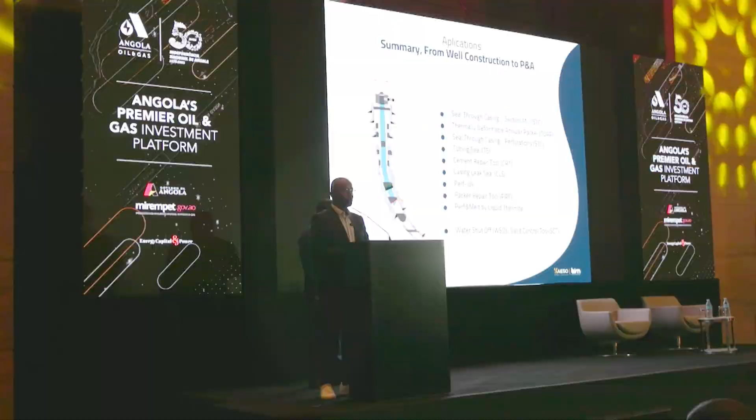Why are we here? We are here to talk about the business of oil and gas. What it consists of: punching a pocket of oil and gas. In this pocket, we have pressure and temperature, and because of it, it can lead to leaks. You will see that in our business, most of what we do is introduce technology that helps us contain those leaks, using different equipment at different stages of our well architecture.

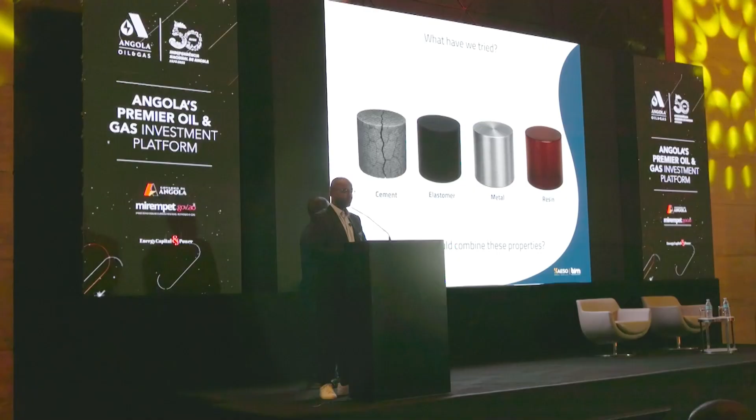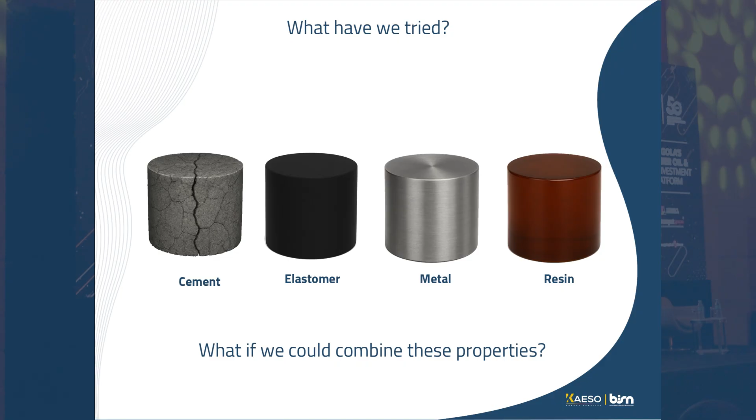We used different materials. We've tried to contain leaks with cement, but sometimes it cracks. We've tried with elastomers, but we know they get affected by temperature, pressure, and fluids. We've tried with steel. We also lately tried resins in complex geometry. The good thing about resins is that they take the shape of the medium where they are.

Now imagine if you have a material that can combine the properties of resin, taking the shape of complex geometries, that has the strength of metal, and that allows you to contain leaks as well as elastomers do. Well, ladies and gentlemen, this is why you're here today. This is BiSN.

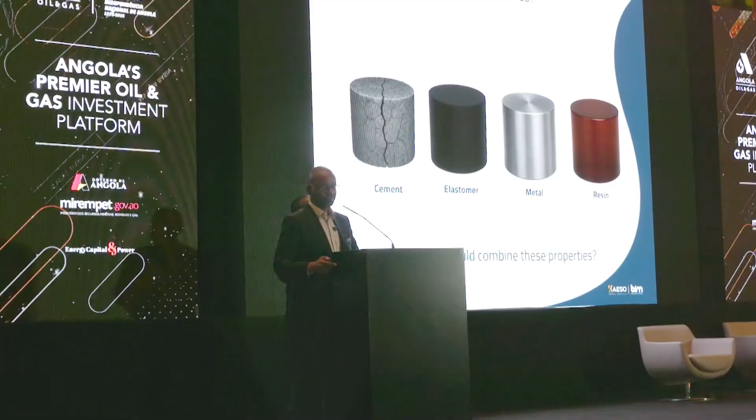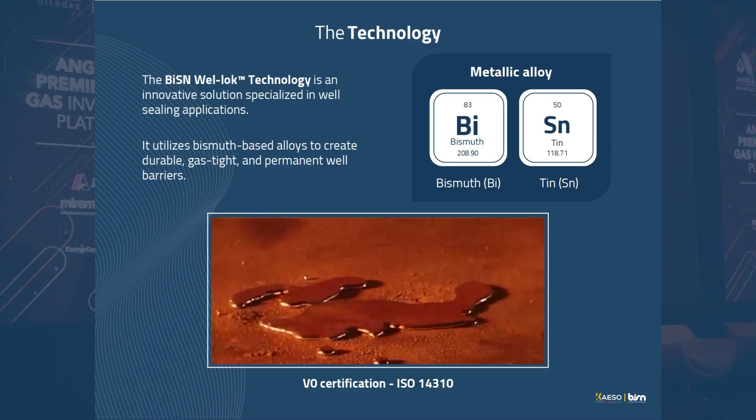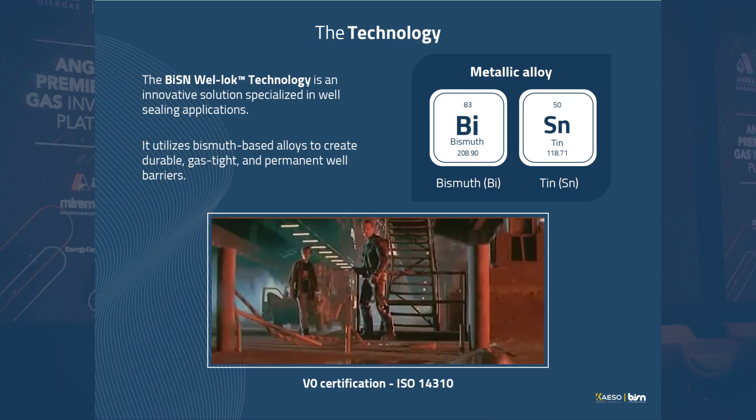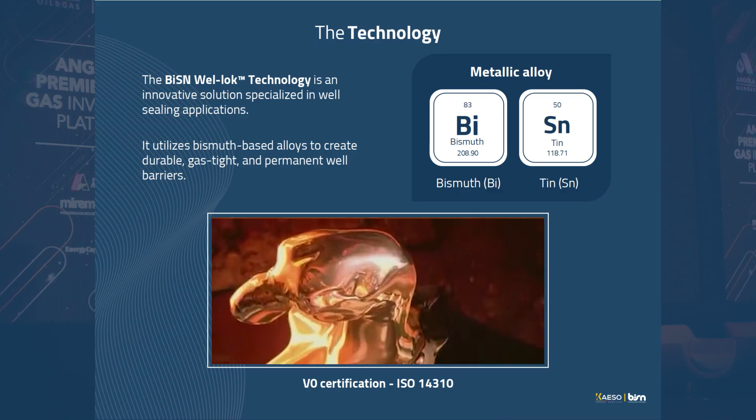Who remembers from which movie the line 'I'll be back' is? Yes, Terminator. In the second sequel, there is a strong enemy, the T-1000, an enemy that has liquid shape and can also solidify itself and become extremely hard and strong. This is one of the best visuals to explain to you what BiSN does.

This is a movie. Now, in real life, what does it look like? We will see a very short movie that will show you what it looks like in real life.

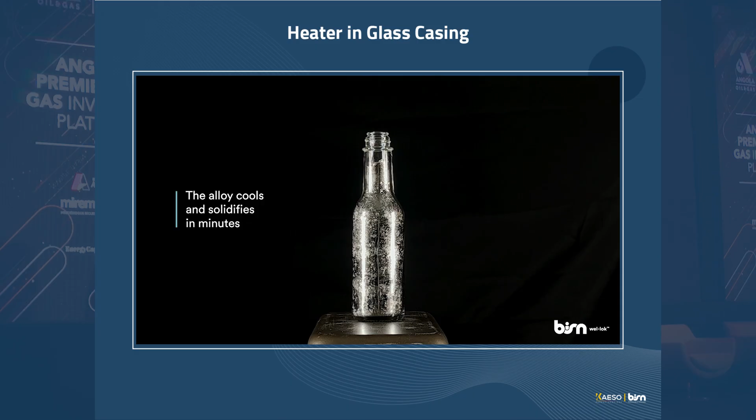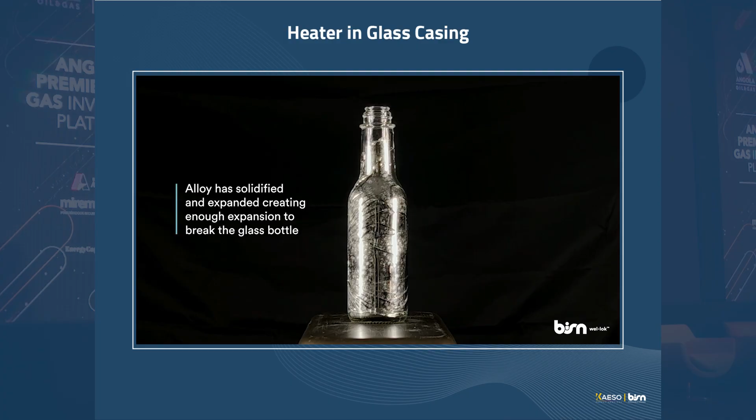You'll see a movie where we pour this magical alloy into a containment, a bottle. You can see it's liquid, and it takes the shape of the bottle. After a while, it will solidify itself, and as it solidifies, it will expand and start to crack the bottle. This is a property that will guarantee its sealing properties.

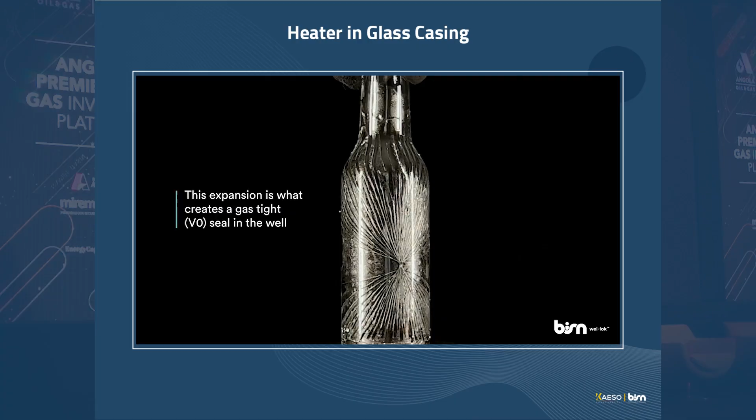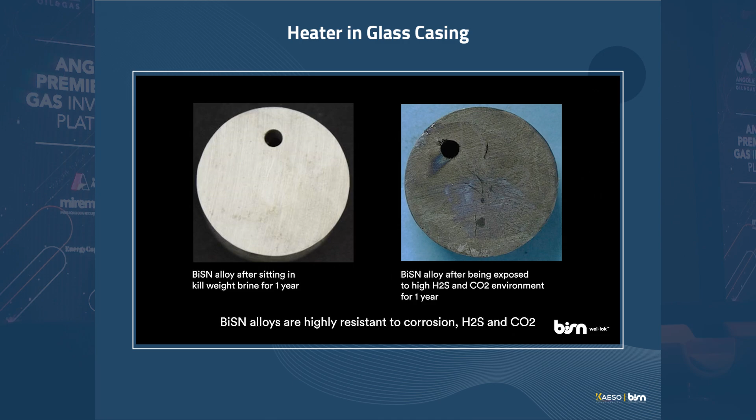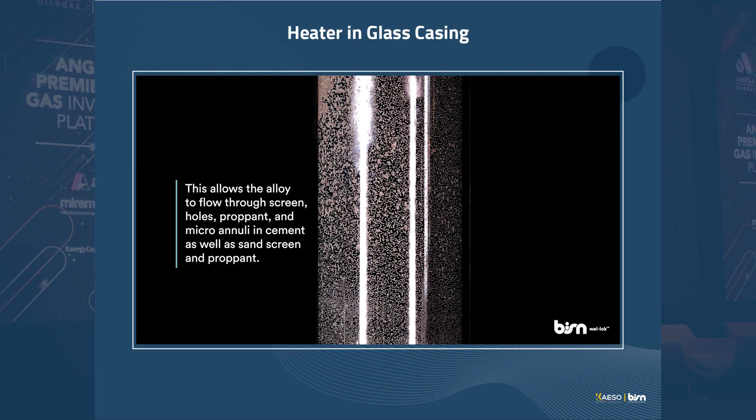One other thing you will see is that this material is V0, gas tight. It can contain fluids and gases. You will see that this material is durable and can resist H2S and CO2. You will also see that it is extremely fluid, like water, and can get into any type of void. Another interesting property is that this material has the density of lead.

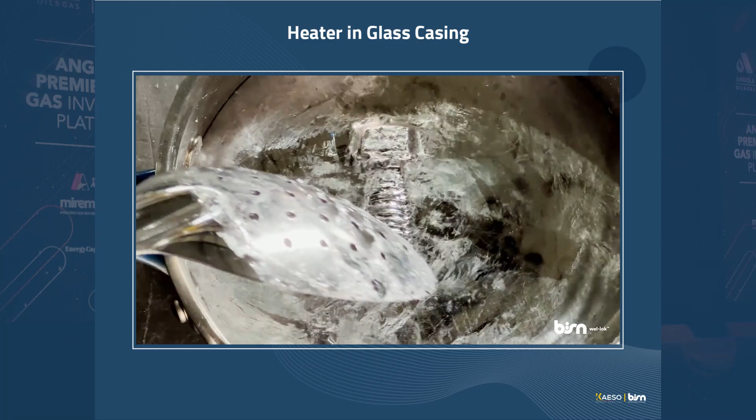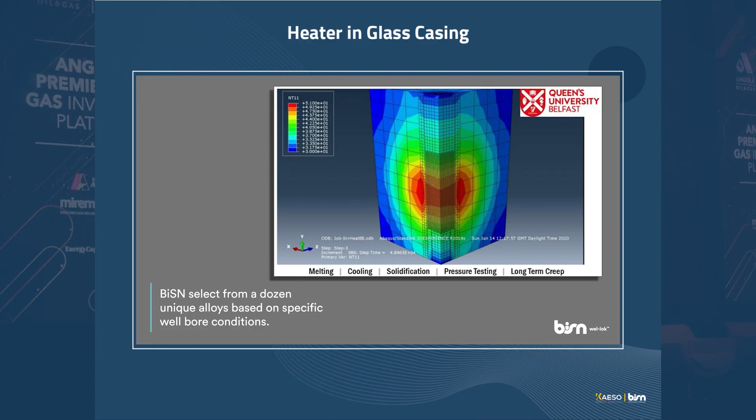Imagine it, as fluid as water and as dense as lead. Now think about that well architecture. How many things you could do with such a material? And this is where I will explain to you very quickly how we can use this material in the well.

The best analogy is to see this material as a candle. In the middle, you have the wick, right? And then around it, you have the wax. When you ignite the wick, what you will see is that the heat will slowly melt the wax, and the wax will take the shape of the material that contains it.

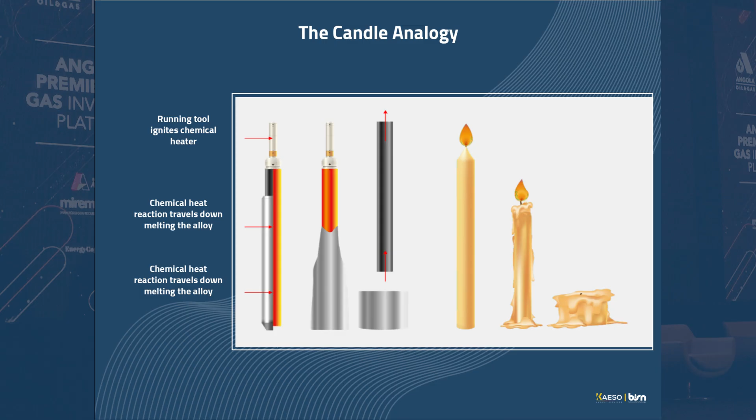So this is exactly what happens with the BISN in the well. You have an element in the center that will heat up the alloy, will make it liquid. This liquid will take the shape of the means where it is, and then it will solidify and guarantee that there is no leak.

So I will now leave the floor to Landry Pouna, who will explain to you in more detail exactly how it works. Thank you very much. Thank you, George, for your comprehensive introduction about BISN technology. Now I'm going to dive a little bit more into the technical details. I will try to keep it as simple as possible, just for everybody to understand.

So as George well explained, it is a liquid metal alloy that is used basically to create a seal in the well, right? And here we're achieving a gas-tight seal. Not only are you stopping the fluid, but you can also stop the gas. It's been qualified as a gas-tight seal, right? It's a technology that we actually deploy in Angola, and we saw it as a game changer. And I'm going to explain why in the coming slides.

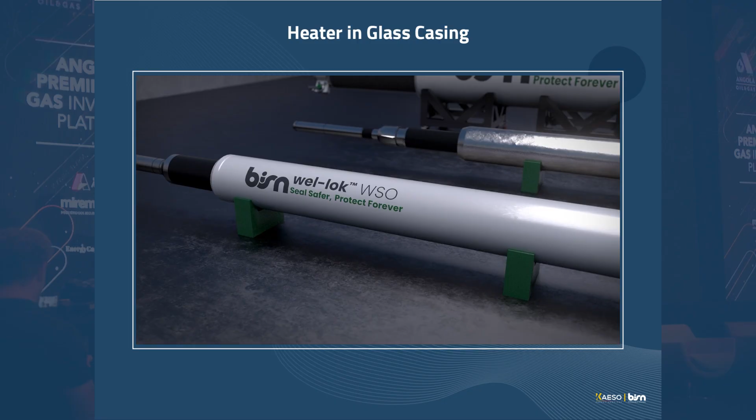I will start first with a short video, just to illustrate how this technology is deployed in the well for a better visual understanding. Start, you can cut the sound of the video, just the video. So in this example, you will see a clear example in the well of how the technology is deployed.

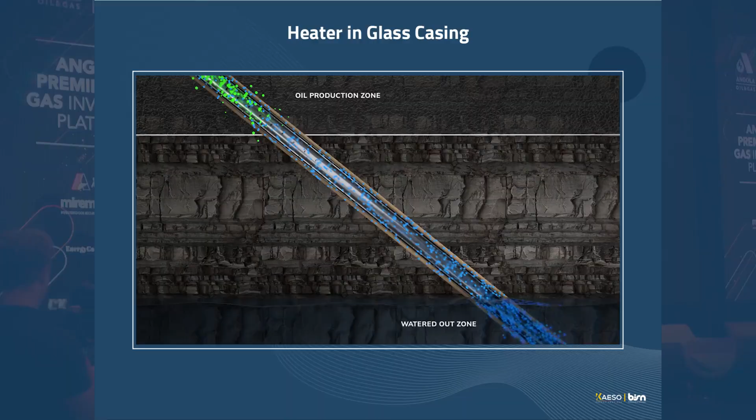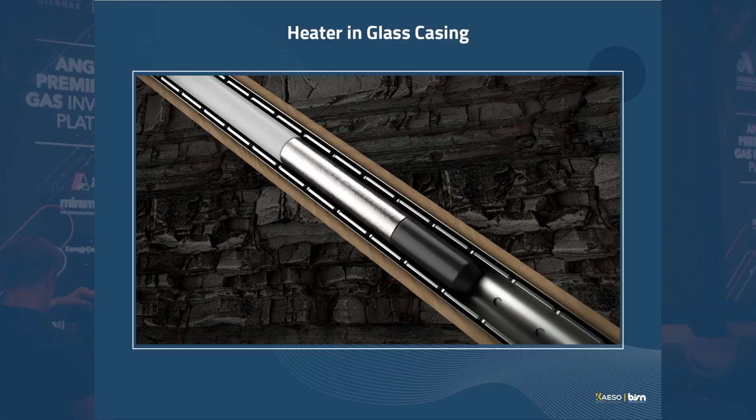So you have the tool that will be run in the well and set at the desired depth, right? The tool itself is like a tube that is packaged with the alloy and the heater, right? As you can see, you have the heater in the middle, and around the heater, you have the alloy. So you run it in your well to the desired depth.

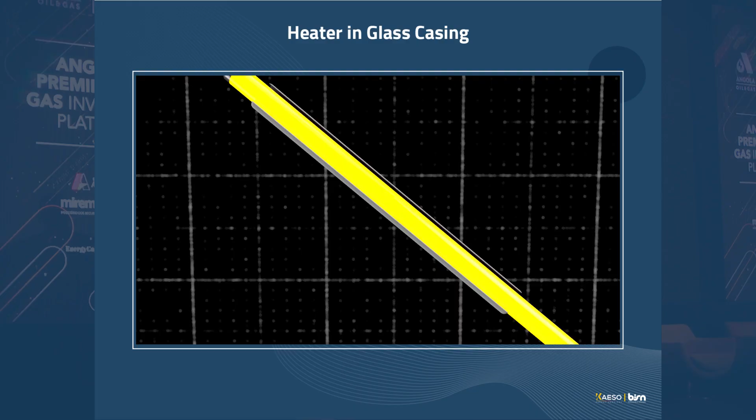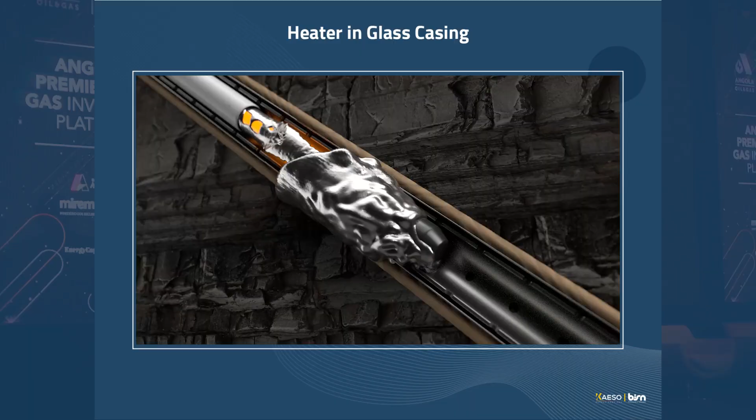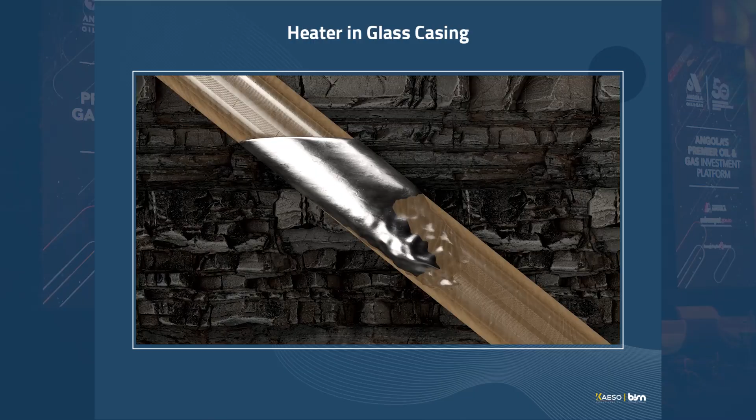You activate your heater. The heater, in turn, will melt the alloy, and the alloy will flow into the area where you want to achieve your seal, as you can see in the video. You pull your heater, you leave the area to solidify, and you can achieve a plug there. So you stop the unwanted fluid that was coming from the bottom, and you separate it from the top part, right?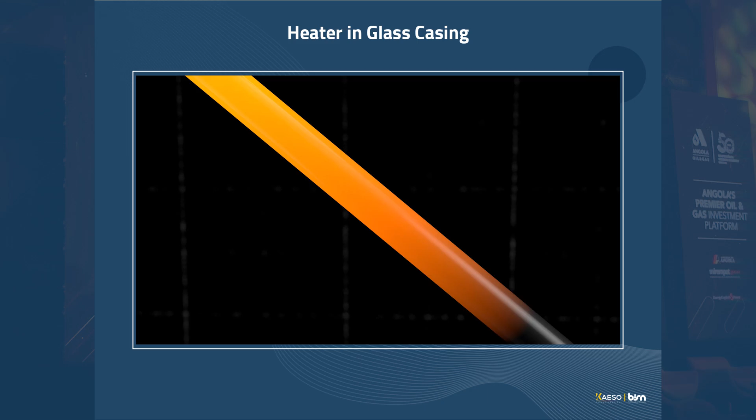That's a very simple illustration of what we call a water shutoff operation, right? So as you can see here, at the bottom it was the water that was shut off. So I started with the video for a visual understanding. I want to dive a little bit more into the operating principle. As you saw in the video, I split it into 4 key steps of how the technology is deployed.

The first step is deployment. So you have your tool that is prepared, I would say fabricated, for the application that you want. I want to dive a little bit more into the deployment method, right? All the conventional deployment methods: drill pipe deployment, slickline deployment, coiled tubing, or even e-line deployment.

So you have your tool that is prepared and placed where you want to create your seal for the well application that you want to achieve. Then activation: you deploy in your well and activate the heater, with thermite for drill pipe deployment, thermite for e-line deployment, or chemicals. So you bring your tool and it will melt the alloy where you want to create your seal. It will be able to flow into the area where you want to create your seal.

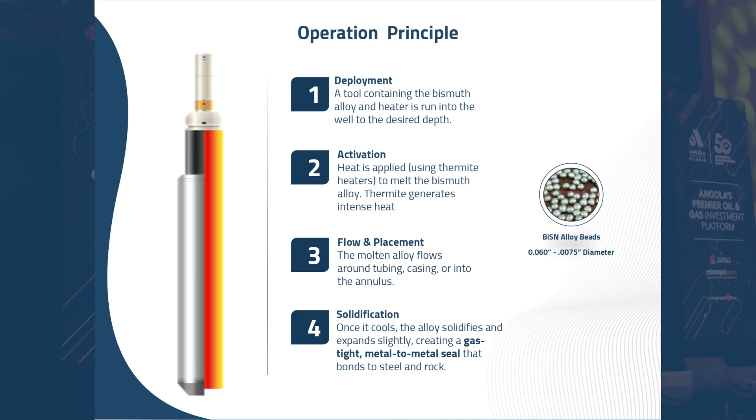You pull the heater, you leave it, and the deployed technology solidifies and creates the very durable metal-to-metal seal that George presented. If you are here in a liner or casing, or if you see on the right side, there are beads in the formation. For example, here you can see it. It is a very simple, non-toxic way of explaining the process of setting and deploying the technology in the well.

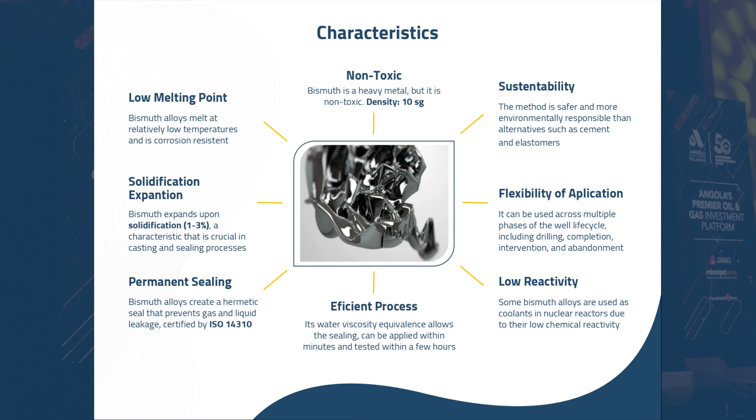Another key characteristic of this alloy is its integrity: it cannot corrode, it's resistant to H2S and harsh environments, and with its density it can flow easily in your well through gravity, into every void in the well. So imagine the technology we're talking about: it's resistant to H2S, and works from drilling to completion in the environment that you have in your well. This is an example of a well.

You can have many applications that can be accomplished. Imagine the technology, like a fluid tool; you can use sealing on the well construction side. There are a lot of applications: sealing casing leaks, from drilling to performing a cement repair, P&A, tubing sealed through casing, and many other applications. These are conventional applications, from the well shut off at the bottom.

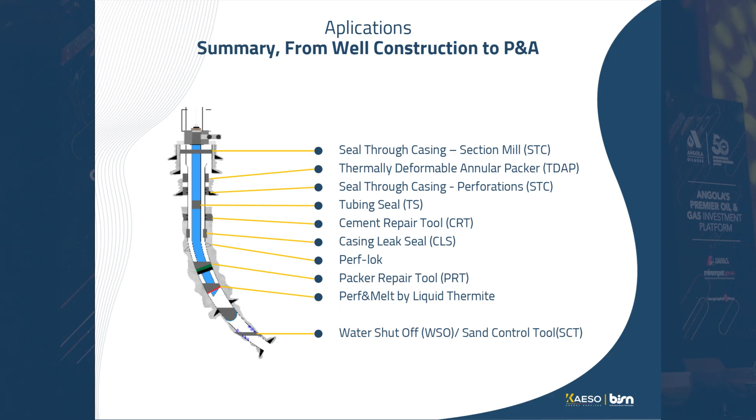These conventional operations are usually done with conventional solutions, with rubber, sealing casing leaks, plugs, cement, performing a cement repair, even tubing sealed through casing, and many others. These are the conventional technologies. We go beyond that. And these operations are usually done with conventional methods like rubber, which maybe were not so simple in the past. Talking about cement, and annulus repair.

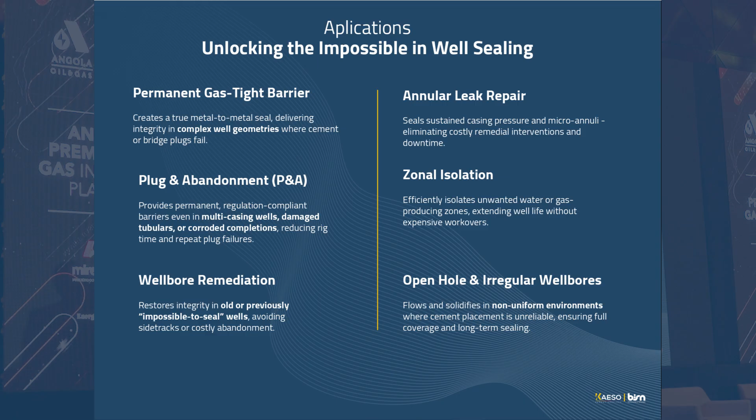But one key important point with this technology is that we are going beyond this limit. We can even achieve sealing where conventionally it was not possible in the past. This is annulus repair and zonal isolation. One of the wells we did was actually challenging. The big job was to seal the well's water production, which conventional sealing methods could not do. So we're going here beyond the limit.

Now, why was it challenging? Because you have a completion, usually with a screen. This is a case study. The screen is just like a casing, and it was actually a challenge. Then you have the gravel pack, and the job was to seal water production. How do you achieve sealing in this case with a conventional method? It was challenging because with a plug you will still have migration through your gravel pack, and you can't squeeze cement through the screen.

You will not be able to, because the cement will not be able to go through the screen. And then you have the gravel around your gravel pack. How do you achieve it? You can use a conventional method, but it's almost impossible. You set the plug, it's not going to be efficient. You will still have migration through your gravel pack.

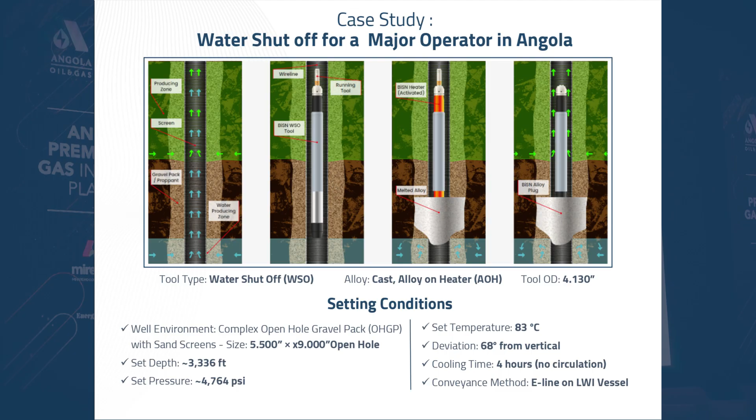It will flow through this technology screen, and we leave it to solidify in Angola and it achieved the seal, right? This was successful, and we received very good feedback. So just going beyond the impossible, right? Water shut-off operation. I'm showing other cases. It was actually impossible to deal with with conventional sealing technology being deployed worldwide.

Here you have an example of two casings. Actually, it's a tubing and casing. How can you achieve a seal in between, right? So just going beyond the impossible in real conditions. I'm showing another case, and that was actually impossible to do in the past. Here you have, as we mentioned, two casings, and you drop the bead. How can you achieve a seal in between, right?

In this particular example, you run only with the heater, which will heat up. They drop the beads. The heater will basically melt the beads that you have in the annulus, and you achieve a quite good seal, metal to metal. The result when this was pulled to surface, in between the casings, can be seen here.

If you see, you run only with your heater, which will heat up the inner casing, which is a 7-inch, and it will basically melt the beads that are in the outer casing, and you achieve the solidified alloy in between, creating the seal here, right? The result when this was at surface, something that was not possible to do in the past.

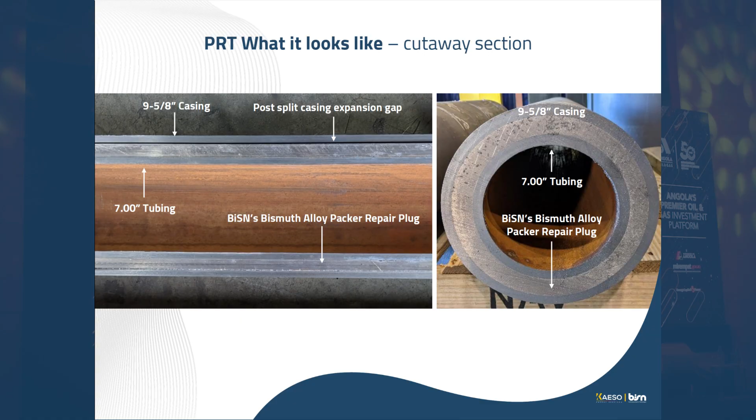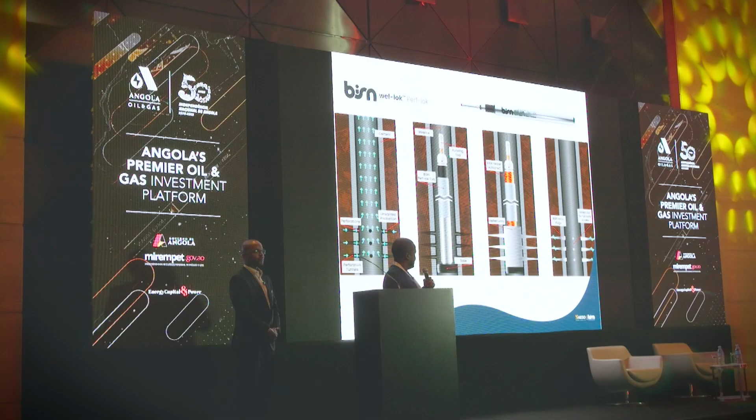To achieve the seal, the tool is run at the perforation section where you melt it, and it will flow through your perforation. What we can achieve with this technology, right? You can see the first image, and every operator knows the perforation is where you have the production zone that you want to shut off.

In this particular case, the second image shows the tool run to the perforation. The third image shows basically the alloy being melted, and that it would flow through your perforation in your well and create, in the fourth image, a metal-to-metal seal. The picture shows the area where you go and mill up the zone that you want to shut off.

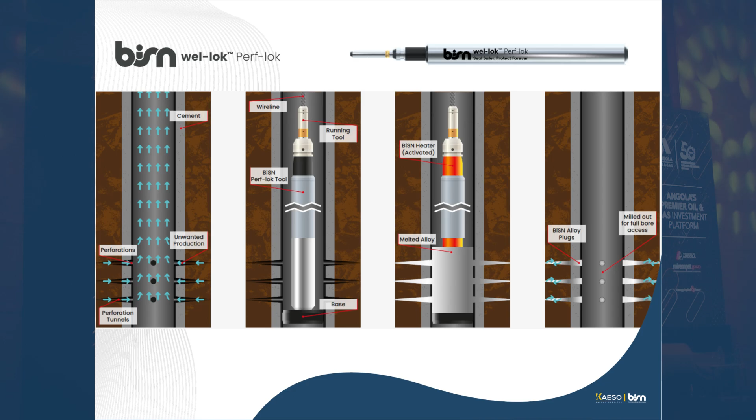When you have a leak, basically in your casing of your well, and you go and you mill for the well construction, that was very challenging. This was in the past very difficult. The technology has a special tool where you can go to this area where you have your leak, set it up around, and be able to melt your metal there that will flow through your leak in your casing. When you have a leak that's physically in your casing, you can pull it and again have full access to the ID of the casing.

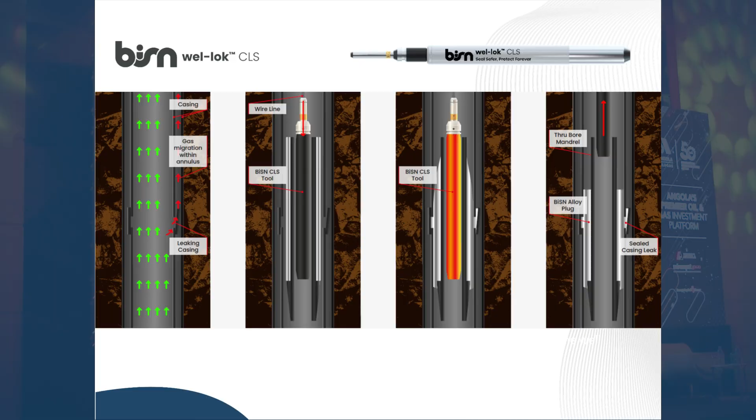The technology has special tools where you can come to the area where you have your leak and set it up around. Then your metal will flow through your leak in your casing, with an efficiency you can think about, and you can pull it out. I was saying that this is not the first time for the technology, even though it's been present less than a decade.

But perhaps a question bringing up what was mentioned. The last slide did mention some of the advantages. So can you perhaps expand, to help us understand in terms of safety measures and costs? In terms of costs, what is the advantage of this compared to traditional processes and tools? Help us better understand this comparison.

Yeah, I will simplify it, right? When you're looking at the technology, you're looking at the cost. Not just the cost of deploying the technology, but what gain you will have by using that technology, just as Victor mentioned. The technology can be costly. I'm not saying that this is a costly technology, but the gain of the incremental production may be huge. I give an example here that we deployed in Angola, which was almost impossible to do.